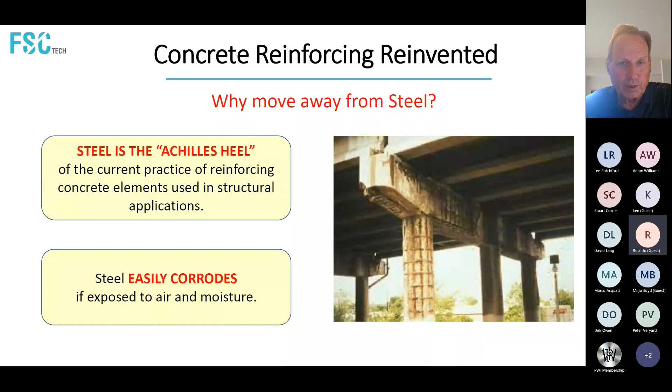A long-term life cycle for steel-reinforced concrete depends on one thing: the high pH environment which OPC, or ordinary Portland cement concrete, provides, at least initially. It forms a passivity layer around the steel in this high pH environment, which really helps protect it from corrosion.

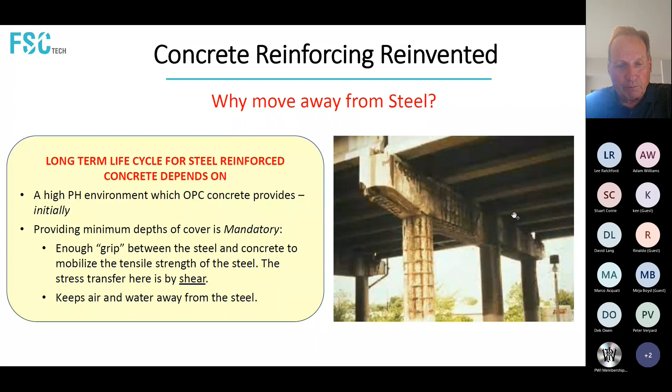The other necessary item is providing a minimum depth of cover, which is mandatory. There are two parts to it. One is you have to have enough grip between the steel and the concrete — enough meat around the steel to mobilize its tensile strength, since stress transfer between steel rebar and concrete happens by shear. Depth of cover also keeps air and water away from the steel.

Here's a simple typical beam to illustrate where our forces are going. We have a beam supported on each end. If you put a load on it anywhere near the middle, you create a moment at the bottom, which is also where stress-induced cracks want to occur. You want to put your steel as close as you can to the surface because that maximizes the tensile capacity of the steel, but the closer you get to the surface, the more the issues we mentioned before come into play.

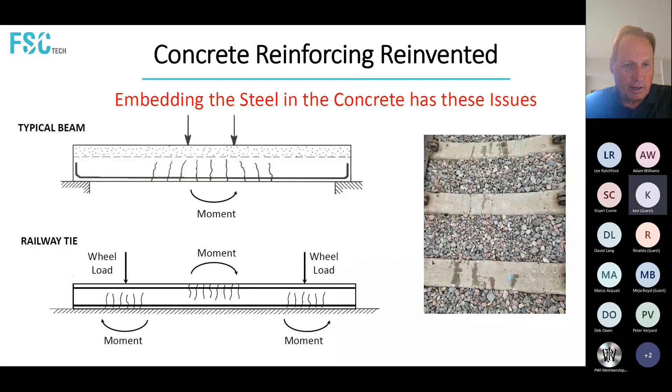Now we'll take a look at what a railway tie looks like. It's a little different — still a beam, but with a different loading mechanism and also a bedding and support mechanism. It's characterized by two really high, intense wheel loads right over the rails.

And those produce a positive moment at the bottom surface of the tie where it's in contact with the ground, and a negative moment in the middle, which is significant because, as you can see in the picture, there's a bending action there, and it's going to want to crack right around the center section of the tie. You can see there that they've tried to do some patching on the cracks just to keep the elements from getting down into the steel reinforcement at the top.

I just see here that Claudio Subacchi has joined the call. He's in the wee hours of the morning, in Australia working with a licensee we have there. So welcome, Claudio. When I get all the tough questions at the end, he can jump in and answer them. Okay, we can go to the next.

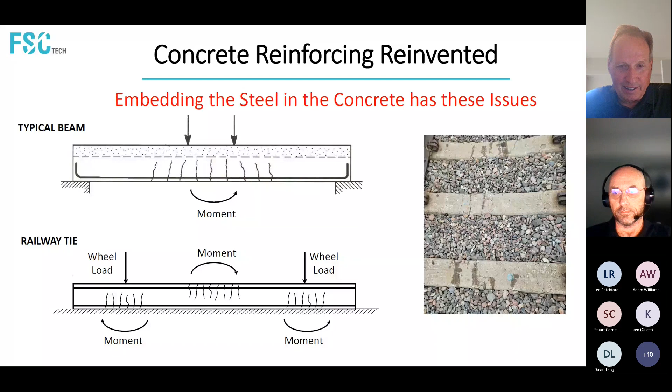So the location of maximum tensile forces in structural concrete are highest at the outer surface layer. But as you said before, the more cover you provide, the greater the steel area required. So you're just building in cost. There's an equilibrium there, that fine point you always try to get to.

Another element of concrete is it goes through a natural carbonation process. So that high pH you started with in the beginning, when exposed to carbon dioxide, is going to start slowly declining over time, which is going to reduce your passivity layer, and of course reduce the protection from corrosion.

One of the other elements here is that concrete is naturally porous and will eventually develop cracks. We were making a presentation to the chief structural bridge engineer of a very large international contracting company, and he made the comment: we always have a saying, there's two kinds of concrete, one that's cracked and one that's gonna crack. So it's just something you have to work with the material itself, because it's a very ceramic behaving material.

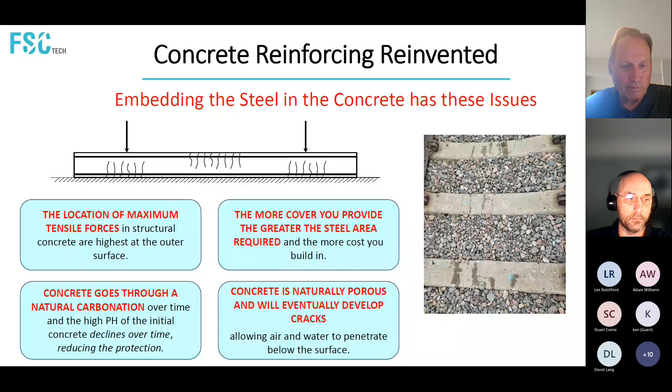Because concrete is the most used material on Earth except for water, reinforced concrete accounts for about 80% of all concrete. And concrete is such a useful and inexpensive building material, it's not going anywhere. It just needs to be improved, and the structural part of it needs to be improved as well to make it all last a lot longer.

So reduction of the CO2 footprint of reinforced concrete is a really high priority to meet global society's requirements to get rid of as much CO2 release as possible. And concrete, because it's such a common material, has to play its part as well.

So there's three simple ways you can reduce reinforced concrete's CO2 footprint. One is you can use a different kind of reinforcing material, which is what we're exploring. The second is by use of low carbon binders.

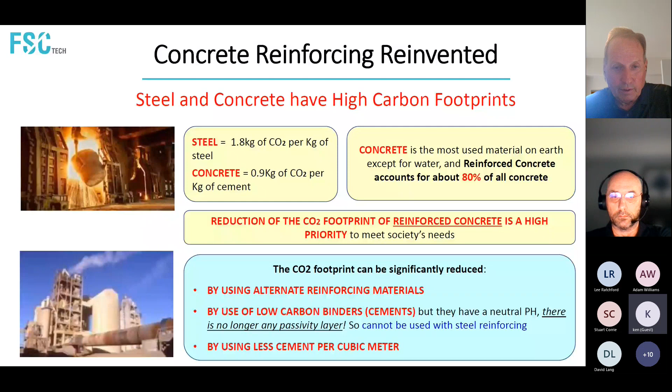So what would an ideal reinforcement for concrete look like? This is some of the questions that Claudio dealt with when he dug into this. Well, you'd want high tensile strength.

You'd want a lot of corrosion resistance. You'd want good fire resistance. One of the things with steel is that in buildings especially, it has to be insulated because it loses its strength rapidly once you hit about 400 degrees C. So in a building fire, you don't want the steel reinforcement to suddenly start getting so weak you have progressive collapse. You'd really like to have some high flexural strength. You'd want low creep.

You'd want to locate the reinforcement as close as possible to the surface element because this maximizes the tensile capacity of the reinforcement itself. So you can have a very strong high tensile strength material, but you have to keep it away from where the tensile stresses are highest. You just have to use more of it.

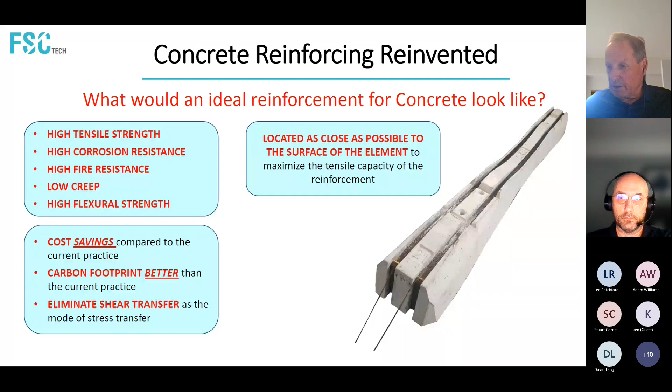You'd also want to have something that's going to provide cost savings to everybody compared to what you're doing today. The carbon footprint certainly has got to be an improvement if it's going to get any traction in the marketplace. And it would really be ideal to eliminate shear transfer as the mode of stress transfer, because concrete is very, very poor in tension, and once the shear force runs up to the tensile strength, then you're starting to pop the concrete.

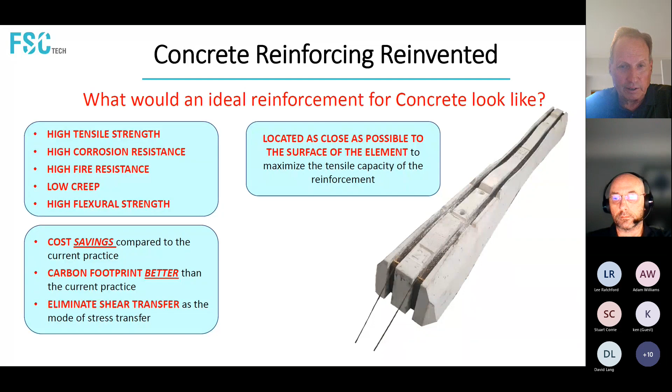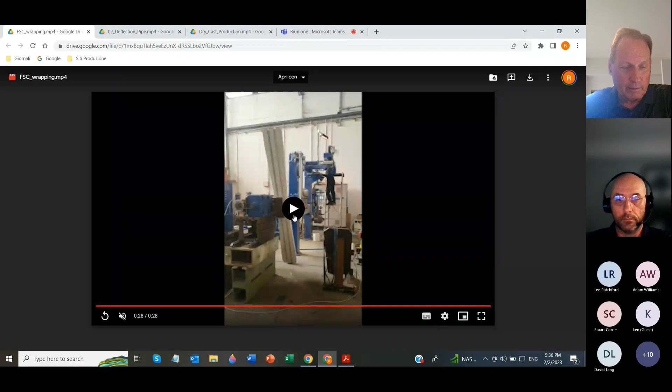Okay, we got a little video here of just winding a tie. These are ties that we're working with a European mainland company who was interested in this technology, and they provided us some ties. We did some winding of their ties for some testing, and this program is still ongoing with this company.

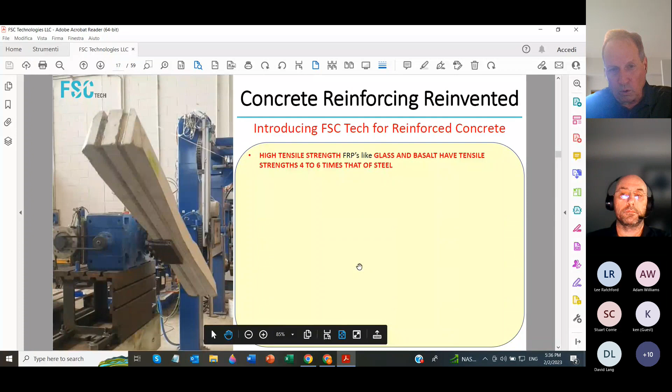But this gives you an idea what we're doing here. So we're winding it under tension, and the windings will be on both sides of the tie. So what we're doing there is putting the whole concrete element into a post compression, similar to what you're doing with pre-stressing, but you're doing it afterwards. The post compression goes throughout the whole concrete element, so it's much more even than just a straight pre-stressed piece.

So the kind of fibers, these FRPs that we're using, like glass and basalt, have tensile strengths very high, 4 to 6 times that of steel. They have high corrosion resistance. And basalt in particular also has natural UV resistance because basalt is a naturally occurring mineral.

In fact, it's the most common mineral on the Earth's crust. It's basically a volcanic-based material. And the production of basalt fiber is very simple. You just melt the basalt down to a point where you can draw it through and make fibers out of it, and that's it. There's no additives, there's no processing. So it's a very simple material to process into an FRP material for reinforcement.

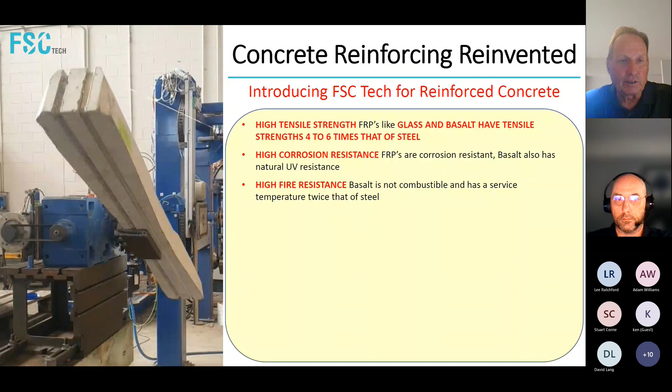It's got high fire resistance. It's not combustible and has twice the service temperature that steel does. It's got excellent flexural strength. By winding it in tension, you enable the low modulus of elasticity to deliver a level of flexural strength that's really been previously unattainable by any other reinforcement scheme, which you'll see a good documentation of in the coming slide.

Once you wind this in tension, your material has near zero long-term creep. And of course, it's located as close to the surface as possible because it is at the surface. So again, we're providing the same effect as pre-stressing, providing a post-compression to the tie in this case, but it's being done in a very highly efficient procedure.

And the cost and the CO2 footprint are both better than what's being done today. The FRP used in this method is less expensive overall than steel, if you compare how much the material costs in roving for a tie compared to what the steel costs per tie. And it has a 30% CO2 footprint savings to go with it.

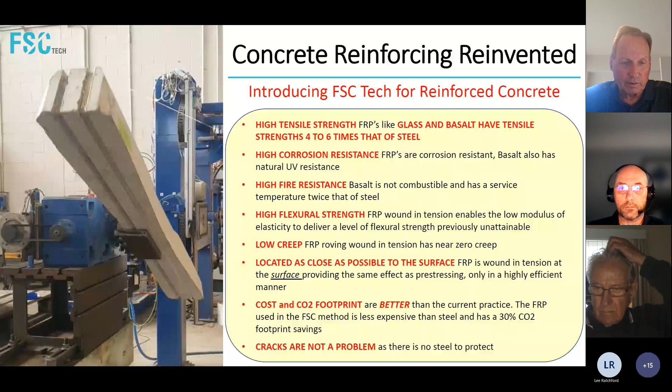And cracks are really no longer a problem because there's no steel to protect, and because you're putting this concrete element into such post compression, if you stress it and develop a crack, once the stress has been relieved or taken off, the post compression will immediately close it. It will close the crack just like that, and close it up.

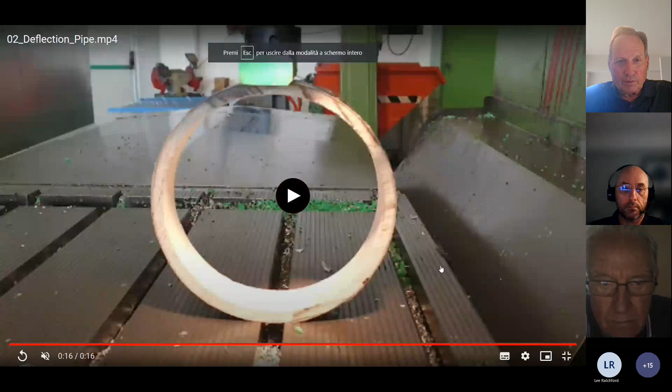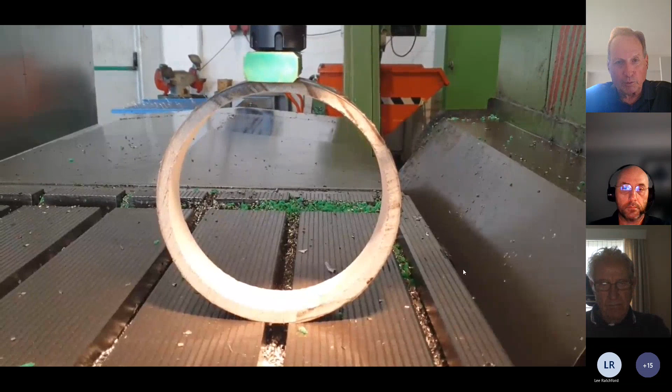So here's our little video here. This is a pipe, and this whole research started with pipes. This is a 200 millimeter, or 8-inch diameter, inside diameter concrete pipe with a 10 millimeter, or a little less than half-inch, wall that's been wound with the FSC technology and put into this post compression.

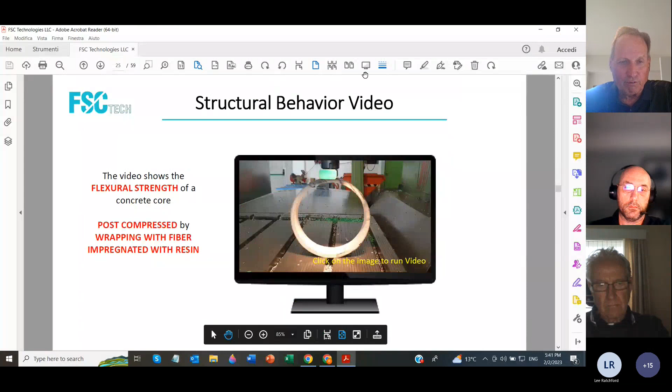And you can see it has a very high degree of flexural strength. When we showed this to the people at MXV, which is owned by the Association of American Railroads, the engineers ended up dubbing it flexible concrete. But if you were to take that same piece and do this test without the reinforcing on the outside, it would shatter before you even saw it move. It would shatter into four pieces.

So it's the idea of doing this in tension that's really providing this benefit.

Now that we're not trying to pre-stress ahead of time to produce these pieces, we suddenly have the opportunity to utilize dry cast concrete, which is an immediate stripping process and is highly productive on a small investment compared to the big carousel or long line plants used today to produce pre-stressed sleepers. Again, the tie is post-compressed after curing by wrapping in tension with fiber impregnated with resin.

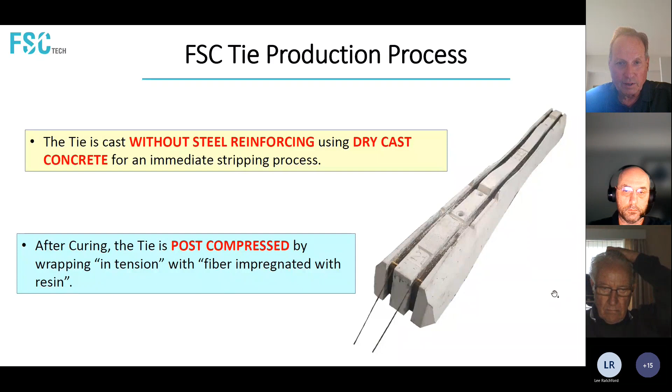Dry cast concrete is all around us. Everywhere you look or walk down the street, you're going to see dry cast concrete. It's the most common method across the globe for production of high volume precast concrete products.

You see concrete pavers, and in the lower left, concrete pipes. There are literally millions of feet of dry cast concrete pipes under rail lines around the world. The center section is a split block building in northern Pennsylvania, exposed to the elements, very durable, with architectural touches. The pictures on the right are pre-stressed hollow core, which is actually a dry cast production process, which some might not know. In the lower right corner is a hollow core parking garage in Northern Europe, exposed to a lot of freeze-thaw cycles, and dry cast has excellent performance in the environment when it comes to freeze-thaw.

One of the features of dry cast concrete is the use of a very low water-cement ratio. This allows you to use about 20 to 25% less cement to achieve the same strength requirement, which is another way to cut the CO2 footprint down, simply by using less binder. The stiffness of the mix allows the form to be immediately stripped.

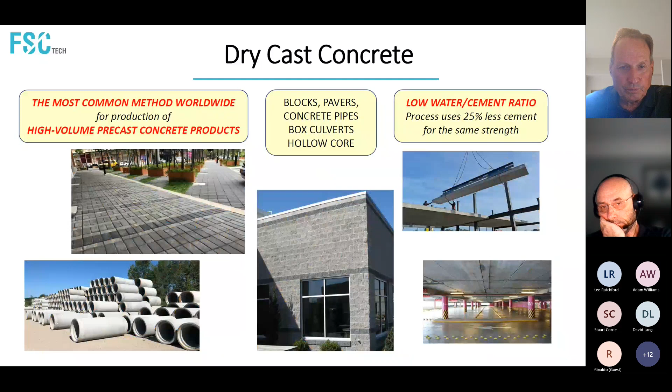Okay, next slide. Sorry, here it is.

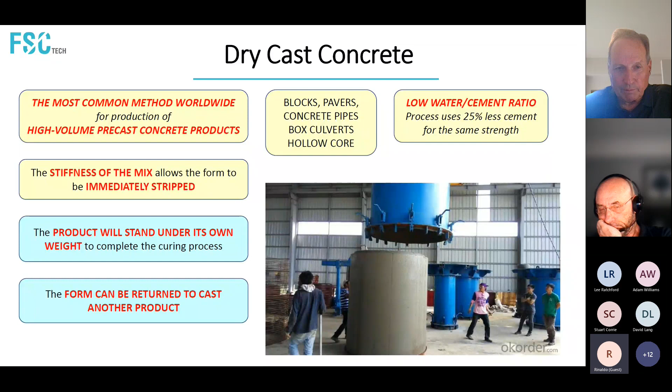The product will stand under its own weight to go through the curing cycle, and as you can see in the picture, the product has been stripped. It's standing there, and the form for this 5-foot inside diameter concrete pipe, 8 feet tall, is being returned to the production station to make another element. So from a machinery standpoint, it's a very low investment compared to a wet cast production system.

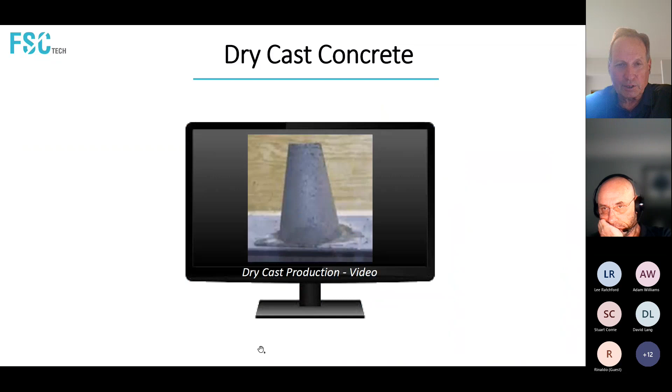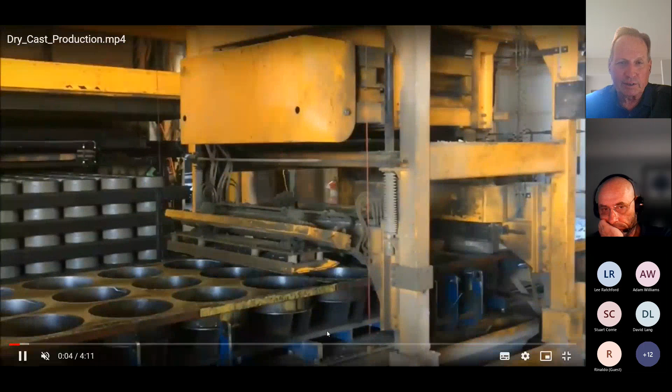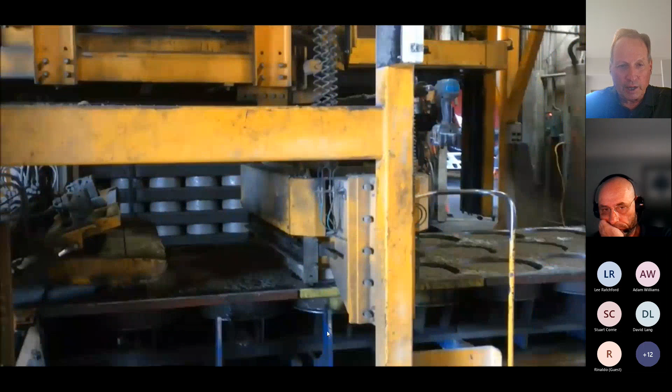We've got a little video here, about 4 minutes long, just to show what type of production line you'd see with a dry cast for rail ties. The product being produced here is not rail ties—this factory is set up fundamentally around hog and cattle slats, but when they don't have production for that, they make other products, in this case simple concrete bases. So the mold cavity you have can be cut up or modified to produce whatever it is you're looking to make.

This is part of the process right now where they're filling the mold and it's vibrating. The vibration used in dry cast is very intense, many times more powerful than the vibration used in consolidating wet cast concrete, because it has to be to get the concrete liquefied enough to flow and move into spaces.

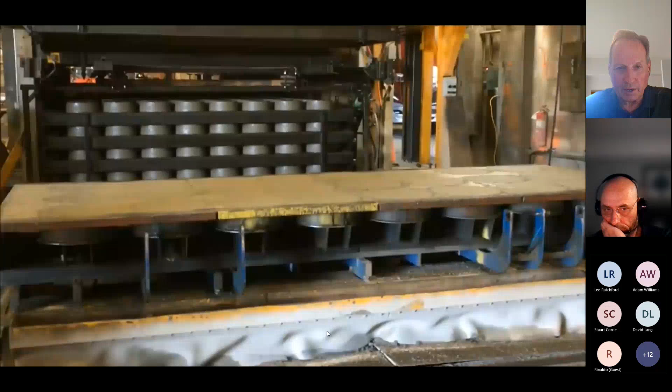Then the final part of this is a troweling process to smooth the outside top surface, but it also provides, as it passes over with the vibrators on it, a confinement for the concrete—making sure the top part is as well consolidated as the other side, which has had a longer time with the vibrators on.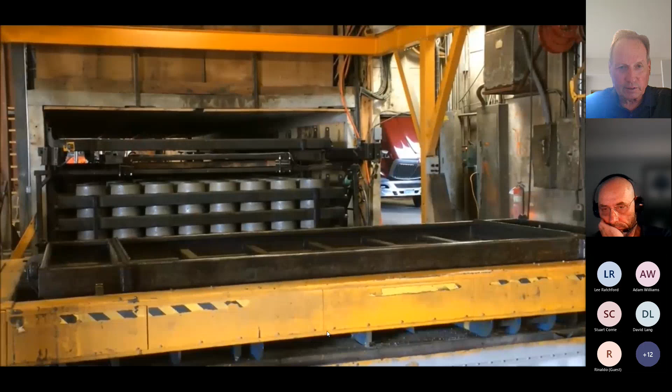Now it's going to be demolded. There's a pallet in the frame of the crane, and it locks onto it. The mold itself is locked to the vibrating table, to make sure that all the vibration goes into the concrete and doesn't make the form rattle on top of the table.

When he sets it down, there's a few seconds where compressed air is being introduced into the mold on what's now the top surface. That's to break the suction that's created when you had it the other way and vibrated all that concrete in there.

Then it'll start lifting slowly, and once it knows it's released, it'll go quicker. It's a little herky-jerky. Now, once the crane moves away, the operator will come and oil the piece.

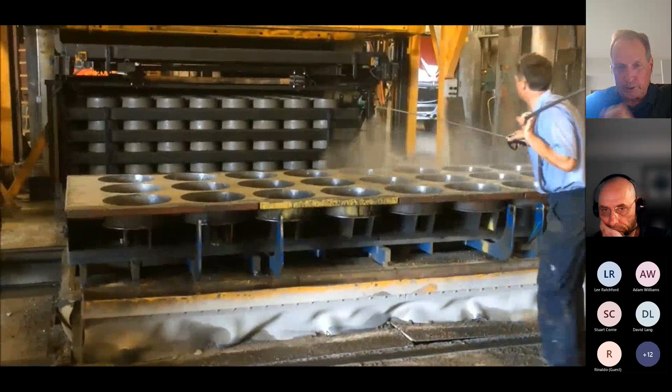So the front end of this production station here, there's only one person operating it. If you had steel reinforcement to drop in there, you'd have a second person at least at the front end of the production line.

The length of that video is 4 minutes if you run it in real time. In that mold and table size you saw, you would be able to put 4 Network Rail G44 rail sleepers side by side. So it's a very productive way to go about this.

The structural behavior of dry cast, because you've got such a low water cement ratio, gives you a rapid increase in compressive strength. It allows you to handle the product and have enough compressive strength within 24 hours that you can perform the wrapping operation.

Again, we have reduced shrinkage and creep, and of course the dry cast has very excellent performance with respect to the freeze-thaw cycles.

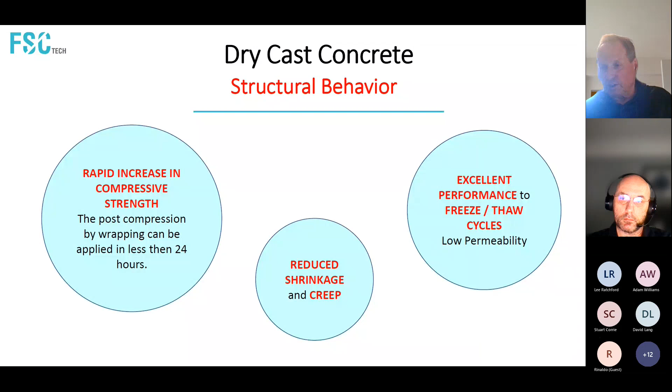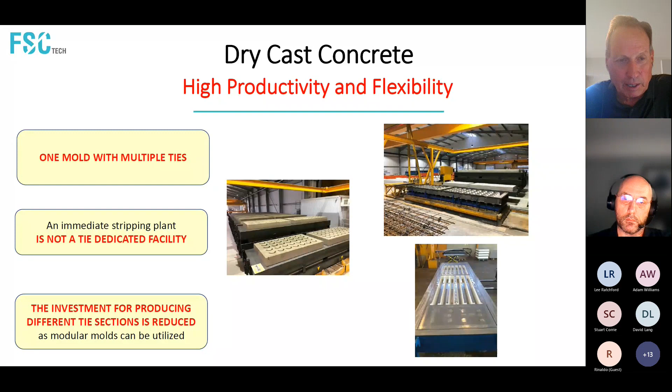So how does this perform in a structural test? We talked at the beginning about the moment tests and requirements that both Network Rail and AAR have for rail ties, and the primary focus is on the rail seat moments, which are higher, and then there's tests for the center section negative moment.

Here's a test we did: we made a very basic tie designed around the original wood dimensions, width of 230 and a height of 180, 8 foot long, and wrapped it and tested it.

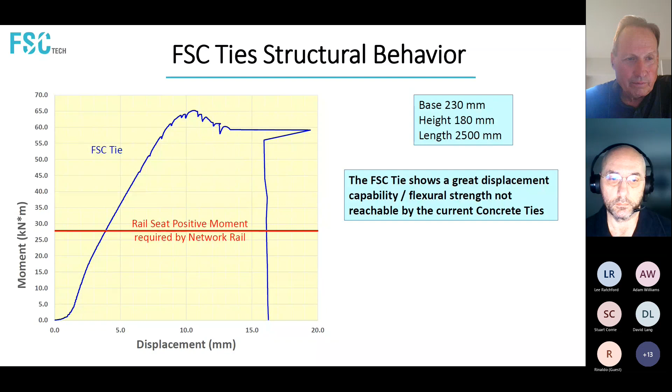Carbon footprint savings: there's binder savings by just not using so much of it—you use 25% less. You can also add to that by utilizing low carbon footprint binders.

Compared to steel, we're using a low quantity of fiber reinforcing, partly due to putting it right at the surface. There's also a small amount of resin used, about 10% of the weight of the fiber. But together, the fiber and the resin have a much lower CO2 footprint than the steel reinforcement does.

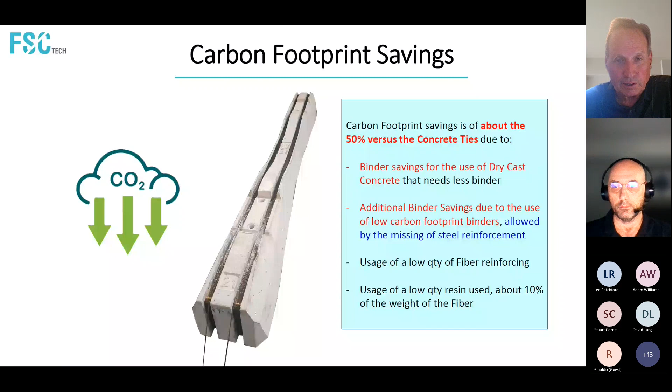The benefits to doing this, of course, we're going to have a much longer life cycle tie because we're not going to be worried about corrosion. And cracks are not a problem. There's nothing to protect inside, and the post compression that the tie is under, once the rail car goes by, if there's any kind of crack, it's going to close right up due to this post compression, so it'll stand very high cyclic loadings, which is a characteristic of rail ties for sure. It's quite easy to produce, and you can also make low volumes of custom shaped sleepers, but the ease of production and the high productivity of the production system, the dry cast system, will improve and lower the cost of ties.

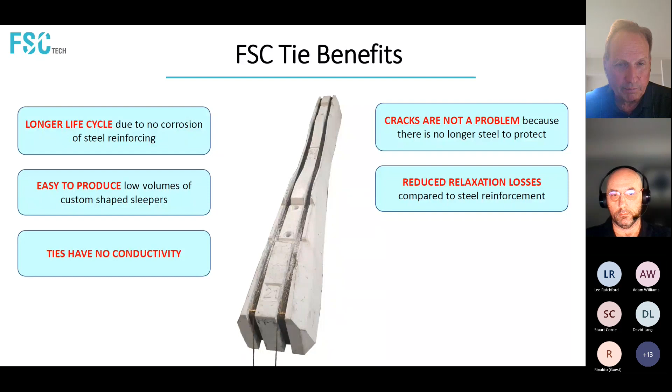Again, we're not much worried about relaxation losses since we don't have any steel embedded in the concrete, and the FRP is already wound in tension. Doing it that way, there is no creep, so we're not going to have worries about relaxation losses. With no metal inside, the only metal in the tie will involve the plates and so on that are the connection system with the rail. But otherwise, they have no inherent conductivity to the tie at all.

Again, cost savings. And next, this is one of the benefits - the FRP system will provide a significant dampening effect for vibrations. And also, again, the carbon footprint savings.

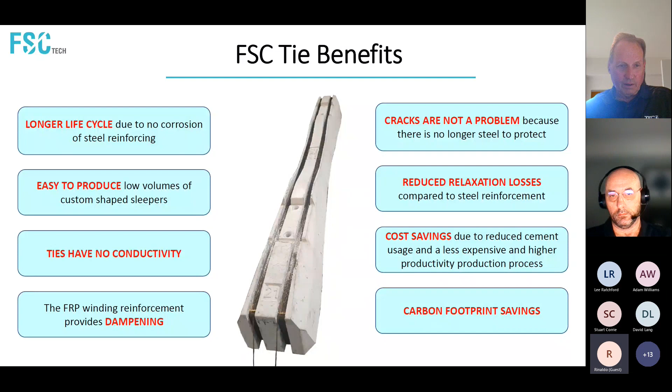Ballast protection pads, something that we also are aware of, and that many operators are moving in that direction. For our system here, it'll be actually quite easy to apply after the wrapping. There's two options. One is we can project a polyurethane material onto the bottom side of the tie to build up the pad. The second one is a standard polyurethane pad can be glued to the FRP wrapping, which will provide a much superior adhesion than you can achieve by just trying to glue it straight to a complete concrete bottom section. There will be a very high adhesion where the FRP wrapping is. And we also, because FSC is also in the machinery business, we can provide the machine for applying the polyurethane.

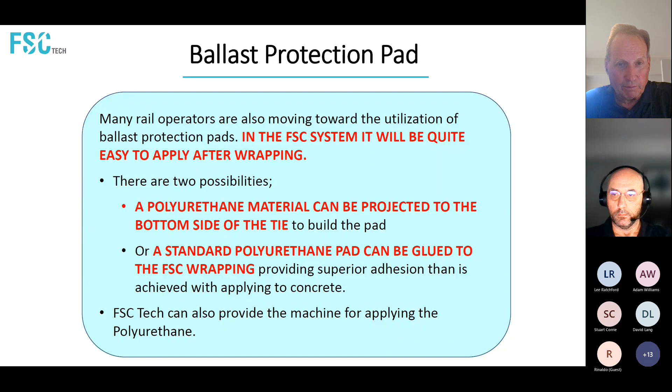So what we have here is it's new, it's very empowering to designers, and it's really a maximization of the material properties of the key materials: concrete, fibers, and resin. All three of these have been around for decades and decades with long histories of high performance in the field. There's no magic pixie dust we throw in the mixer for this stuff. It's just three very common, well understood materials, but used in a very new and innovative way to maximize their physical characteristics. The concrete part we know has poor tensile strength, but it's very good - it has pretty good fire resistance, it's got high compressive strength.

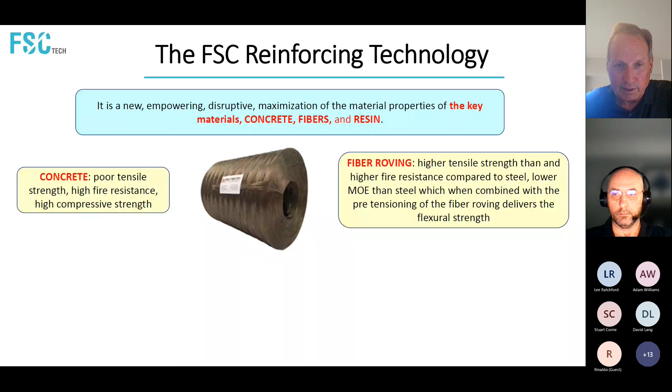The fiber roving has higher tensile strength than steel, higher fire resistance, but it's got a lower MOE than steel, which combined with the pretensioning of the fibers delivers that flexural strength. And the MOE of the fibers is much closer to that of concrete than steel is. So that's part of the thing here, that by putting this fiber on there in the way that we're doing it, it works quite well with the concrete.

The resin has no structural impact or role in the process here. It's used more as an application aid. It helps spread some loads around and eliminate a concentration of loads on particular single fiber filaments. And in the case of pipes and poles, at the end of the process, you have an impermeable barrier on the outside of the pipe or pole.

Going back to one of the original points about what the ideal reinforcement will look like, we talked about getting rid of shear transfer. This system does not use that - it's dependent on filament to filament friction. You can take a product like a pipe or something and put it in a kiln, burn off all the resin, then put it back in the test rack, and it'll perform virtually identical to the one where the resin was on there. So it's an aid in production, but that's really kind of the end of it, other than the really valuable element of a waterproof impermeable layer on the outside.

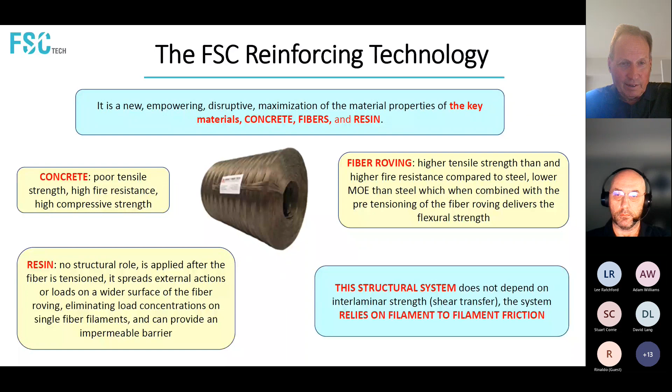Okay, now there are lots of fibers on the market, from glass all the way to carbon, but for the railway ties and for most civil engineering construction applications, it's mostly going to be glass or basalt. There's some applications where carbon might be useful, but carbon is so expensive that it's not for mass-produced products like pipes or ties. Probably the best one for rail ties is the basalt fiber. It's inherently UV resistant, corrosion resistant, it won't burn in a fire on the track, and it's very cost effective for the value it delivers for the long life of the precast element.

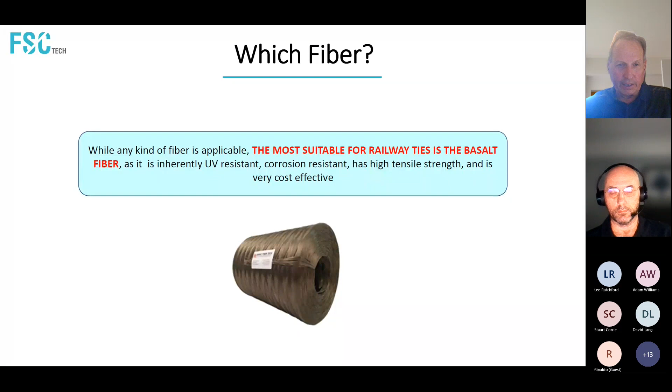And we're preparing now to get into the specification approval program at MXV, which is the renamed Transportation Technology Center in Pueblo, Colorado. It's a wholly owned subsidiary of the Association of American Railroads. If you want to get a new product into the North American railway market, like a new tie like this, or pretty much most anything, you start with MXV and go through their testing protocols before the railways are going to take a look at you and allow you into their system.

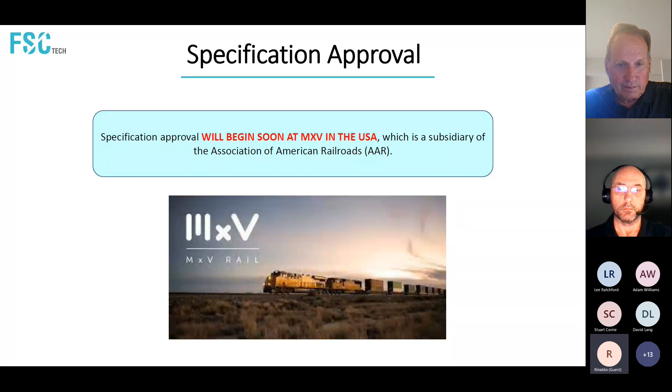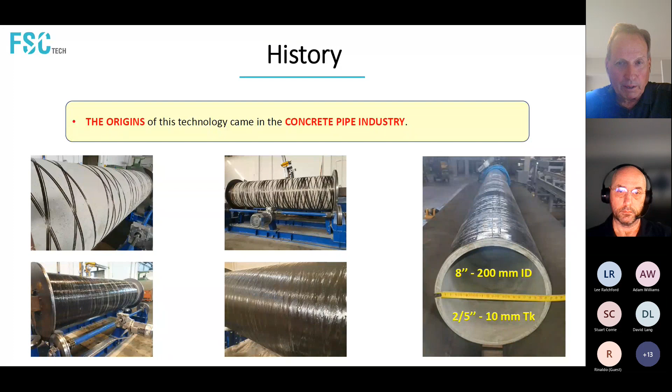So again, as we mentioned, the origins of this came in the concrete pipe industry, trying to figure out how to make concrete pipe more competitive in the market and to get rid of some of the negative things that steel has. Claudio was the CTO, Chief Technical Officer of the largest concrete pipe production machinery producer in the world, a company called Hawkeye Pedershaab, now called Afinitas. He was tasked with trying to start this process and figure out what was going on and if there's something else we could do.

And the use of steel reinforcement, which has been around for 100 years in the concrete pipe business, but the issues with it caused a lot of market erosion in smaller diameters. Again, the goal is to find a new way to reinforce pipe.

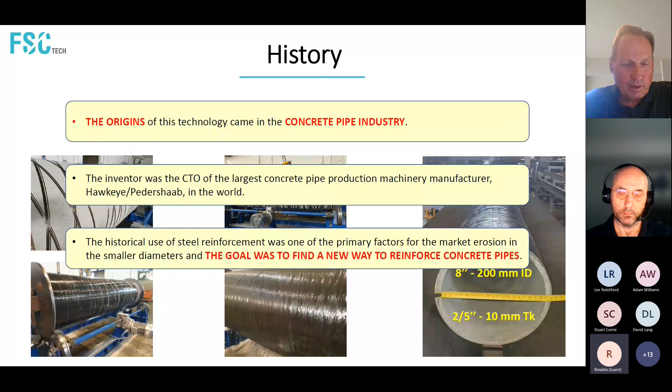Other applications for the railway industry include pipes, poles, and then we'll mention briefly later on hyperloop vacuum tubes.

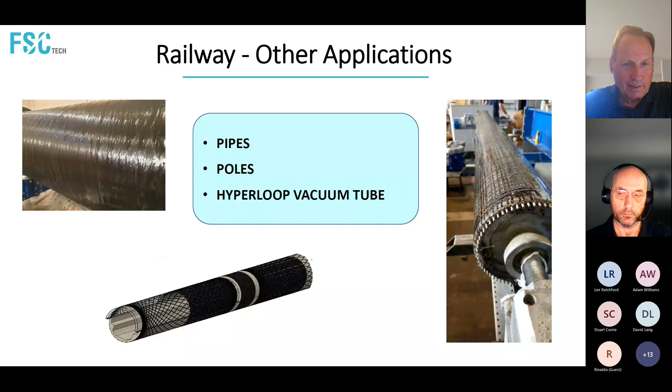And the plastic pipes that have been moving into the marketplace have their own set of issues, including one of an inherent lack of strength by themselves as a structural element. They depend highly upon a very even and consistent layer of compaction around the outside of the product.

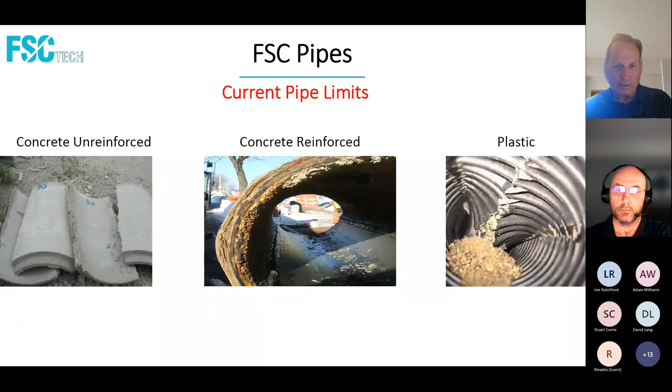So again, we go back to some of the benefits here: the cost, CO2 savings, the corrosion. We can now make regular simple concrete pipes that have pressure capabilities more than 3.5 bars. Because of this outer impermeable coating, you can lay them on aggressive soils like sulfate soils that attack the actual concrete itself.

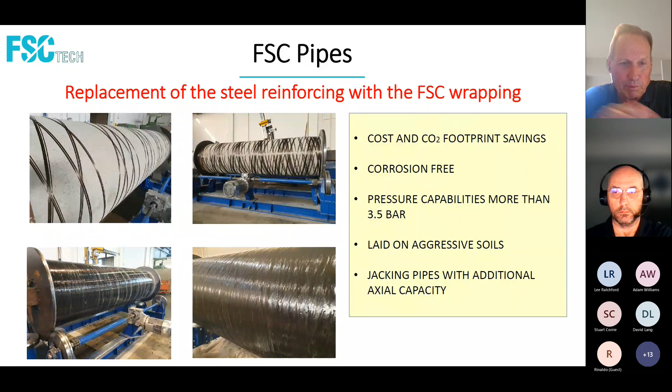And for jacking pipes, there's an additional benefit of not only a sleek and slippery outside, but it provides, depending on how you wind it, some additional axial capacity, and that's where the big loading is in a jacking pipe, when you're pushing on the ends. You get some added compression capacity by wrapping the pipe.

Poles is another application, and a pole, you can think of it as a pipe only stood on end. We can make a concrete core with a conical ID. There will be a long life cycle. The pole mass reduction, we estimate between 25 and 50%, which will drive the cost being lower than current concrete poles, and also drive down the carbon footprint. Also, because there's no steel reinforcement in them, they of course have a lot lower electrical conductivity than current poles.

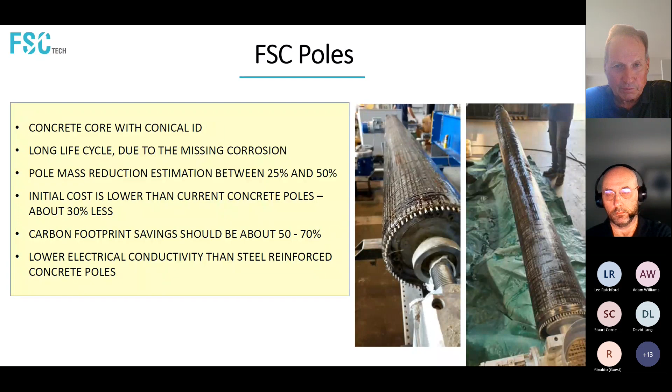Hyperloop vacuum tubes - there's a lot of discussion worldwide about transportation systems being built around this concept of a Hyperloop vacuum tube, and we're in a consortium that's bidding on some work in Italy for a 10-kilometer test, full scale, full height, full diameter Hyperloop tube. We'll be the engineering consultancy regarding doing the tube out of concrete, 2 half-concrete tubes, rather than making the whole thing a steel tube. So what we see here is some drawings we made for this proposal to do this in concrete rather than steel.

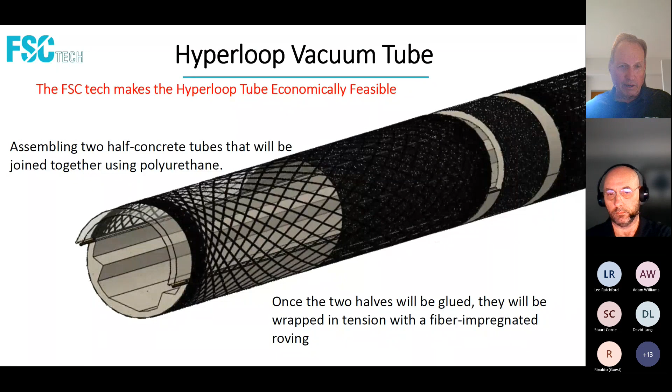So we won't dwell on that a lot. Some of the other applications we have out there are, of course, ultra thin concrete pipes, concrete blocks for high demanding structures, retaining walls, and especially in places with high wind loads and earthquake seismic potential, reinforcing the blocks and then gluing the blocks together really provides a superior wall performance, which we've done tests on, but that's not the subject of today's discussion. The same thing with large format pavers. We've started work doing some testing with manhole covers made out of concrete.

We've had a lot of discussion with companies about pipes for hydrogen storage and pipelines. By being able to wind individual elements like big blocks and then gluing them together, you can create some really large objects, including things like offshore and onshore wind towers.

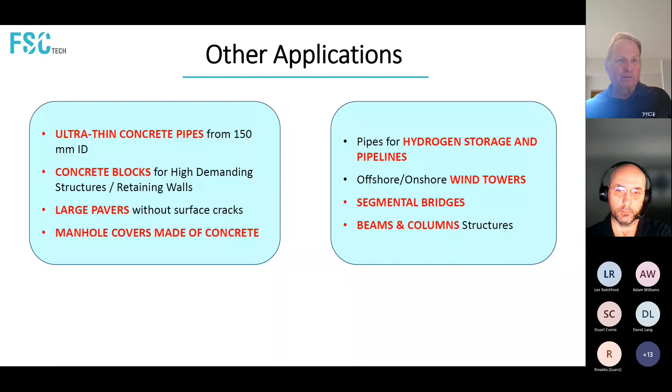You can make segmental bridges, and we have a whole system for beams and columns in the works as well. So there's a lot of other applications, but today's focus is really about the possibilities for the rail industry, and I hope that you got something out of it. And with that, we'd open it up to questions.

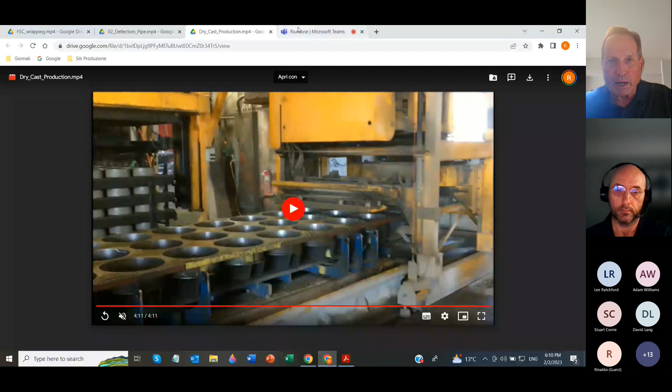I don't see anything in the chat box up there... or no, there's something in there now. Yeah, brilliant, thanks for that, Mark. I think we've got one question in the chat which we'll start off with. If anybody else has got anything else, feel free to raise your hands, or post in the chat, and we'll run through them with Mark and Claudio.

So the first question we've got is from Stuart Corrie: how would a sleeper built this way perform under derailment conditions?

Audrey, do you have a thought on that? Are you muted? Under derailment conditions, what's the risk you mean — of having the wheels cutting the fiber? That was my first thought. Yeah, or is it too recessed to matter?

Yeah, the fiber is actually pretty tough to be cut because it's resin impregnated, so it's not such a big risk in any case, because you still have the concrete below. Basically the fiber itself is relatively tough — it's not something that you shear very easily.